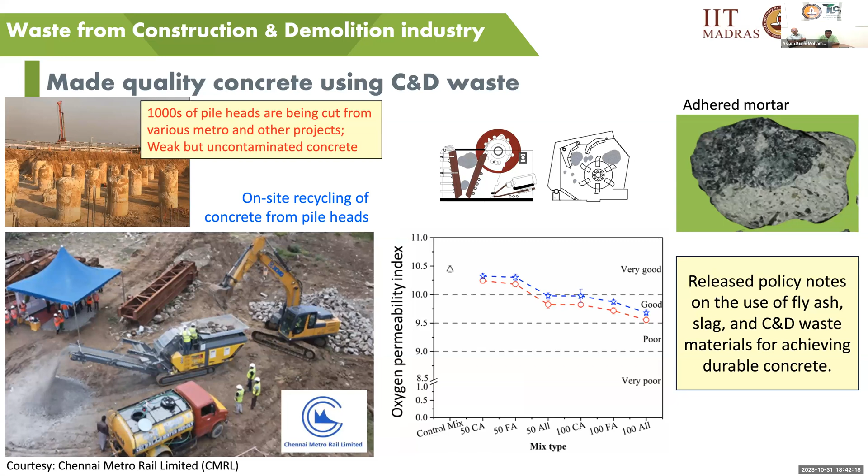Another project we took up involves durability of various concrete systems, which we've worked on for several years, even before the TLC2 center came up. This was a good opportunity to take this research to the field. We worked with a government agency, the Kerala Highway Research Institute, where they were building a major bridge on the coast with a target service life of about 100 years.

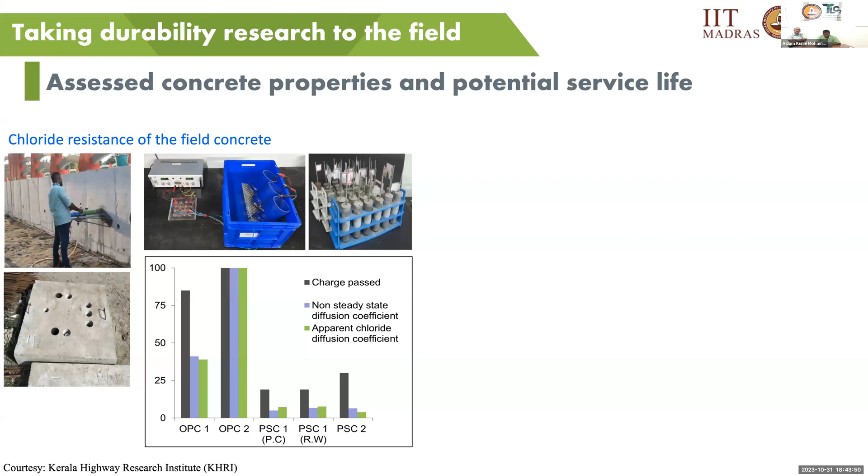To implement it, we first had to convince them that this concrete is useful, so we cast specimens on site and tested concrete specimens collected from the actual structure. We found that the durability of such concretes can be much higher compared to OPC concrete. We also looked at service life estimates and found that with slag concrete, the service life can be about 4 times more than OPC-based concrete.

This was very promising, and they were very happy. Now we know they're actually implementing this type of concrete in other bridge projects as well. But to actually implement it on site and ensure good quality control, we have to specify certain properties.

For this, we developed nomograms where we look at the properties of the binders and the structural design aspects, and then specify that if you use this, you have to go with a concrete type that has a durability parameter, which I'm calling MXDY - M stands for mechanical parameters and DY stands for durability parameters. So if you're talking about a target life of 100 years or so, we have to bring in a durability parameter to specify the concrete.

We also looked at how sustainable these slag concrete mixes are. As you see in this graph, the more the mix comes to the bottom left corner, the more sustainable it is. We also looked at carbon footprint savings achieved by changing the mix design from OPC concrete to slag-based concrete - about 36% carbon footprint savings is possible if the entire bridge is done with slag concrete.

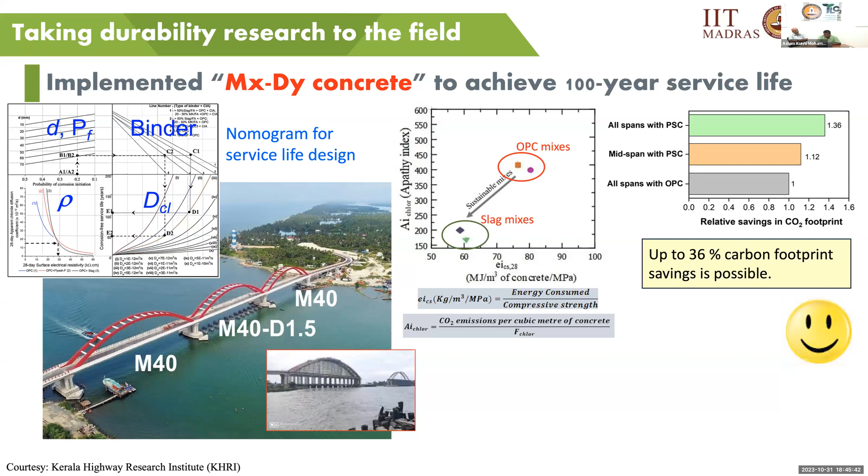But for this particular bridge, we were able to save about 12% because only one span could have the mix design changed. For future projects, we expect more opportunities where SCMs and the MXDY concrete concept can be implemented, helping us make durable construction while saving a lot of carbon footprint. I'll now request Professor Koshy Varghese to talk about process waste and how we are handling that.

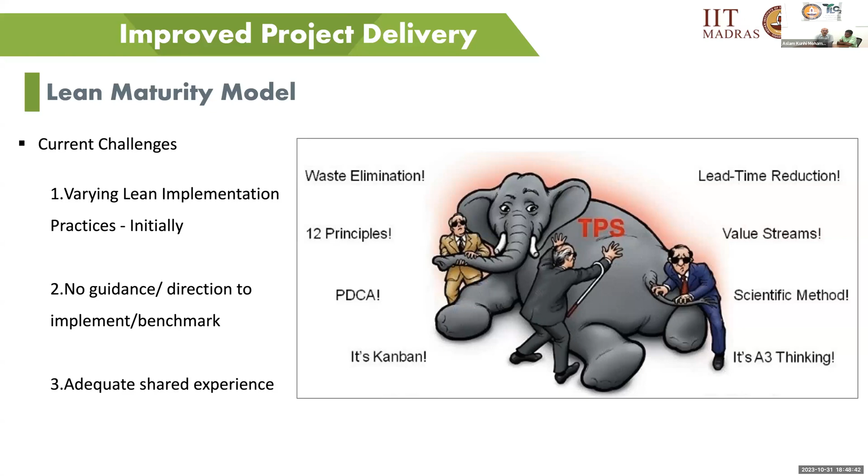Now, to go on to the next slide. When we look at the lean maturity model, we needed a roadmap. Then we needed to also assess. Several organizations claim they are implementing lean, but we wanted to assess where they are. They might say that we've been implementing lean for so many years, and they talk about the project benefits that they've adopted. But I guess in the initial years, there was a little bit of a distributed approach because people needed to explore where they are.

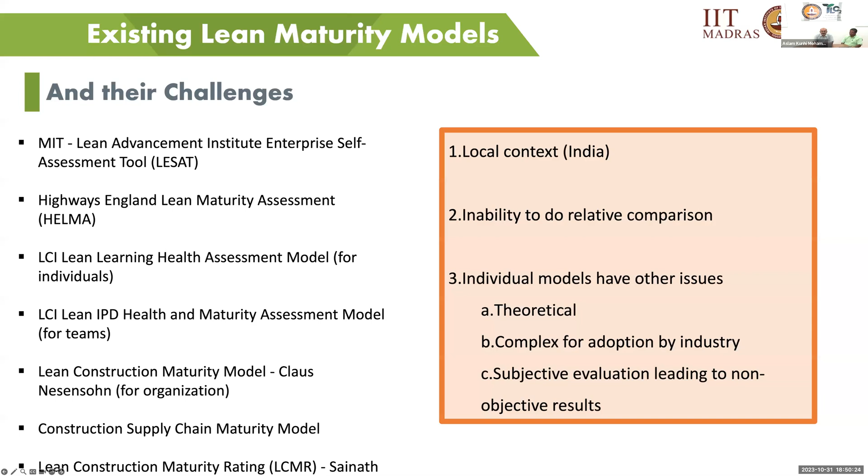One is there's no local context to the Indian context. So when you start trying to take some of the benchmarks from these models, there is no relationship to what is happening in India, so it just does not make sense. And there was inability to do relative comparison and a lot of other issues, in terms of the model being too theoretical, too many weighted indices in the model. We were just not able to go forward with it.

So we decided that we needed to develop our own lean maturity model. We call it the ILCE Lean Maturity Model, which is coming from the group at IIT Madras, along with collaboration with the industry. Basically, it should be Indian context with industry relevance. It should have the lean maturity based on our roadmap. There should be a general roadmap.

It should not be too prescriptive, but it should be milestones that are familiar to the ILCE organizations, taking best practices within the Indian context. Also important was to make visible progress. If you tell a company they're going to reach the next milestone only after 5 years, there isn't too much buy-in. Whereas with every year, if they can see some progress made, there is also momentum developed based on this.

And the last point, as you can see here, we wanted clear evidence based on documentation and observation. So when a team goes to assess the maturity, it should be evidence-based and not just on anything else.

We basically have, moving to the next slide, we have now come up with a framework where there are these 4 levels. There's an L0, which says no awareness, because several companies also come to us and say they are doing Lean, or several projects come to us and say they are doing Lean just because there is some small aspect which they think it is, but we have an L0 for that.

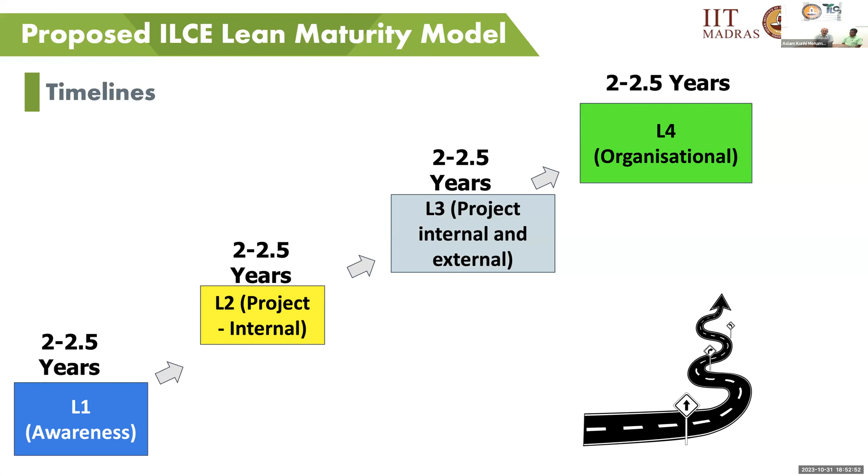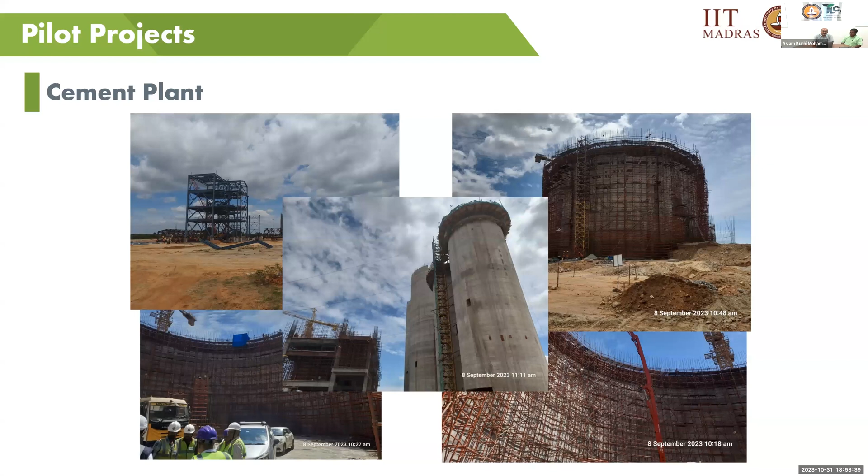So with this, what we did was then we needed to actually start calibrating, see if this model works or not. So what you see is the photograph of a cement plant, which is under construction. A team of us went here and tried. This group was kind of implementing Lean on the project.

So we spent 2 days at site to look at all the dimensions. You can see there's a full planning board there, teams of planning staff, and teams of execution staff also there. The impressive part of this group was that Lean was actually practiced in several processes at the site level. However, there was absolutely no documentation. So when you asked, people knew things, but there was no way they could deep dive or go into more detail because there was no documentation.

So we are actually positioning this group right now at an L1 medium, because having a documented strategy and process is a very important part of being able to move forward.

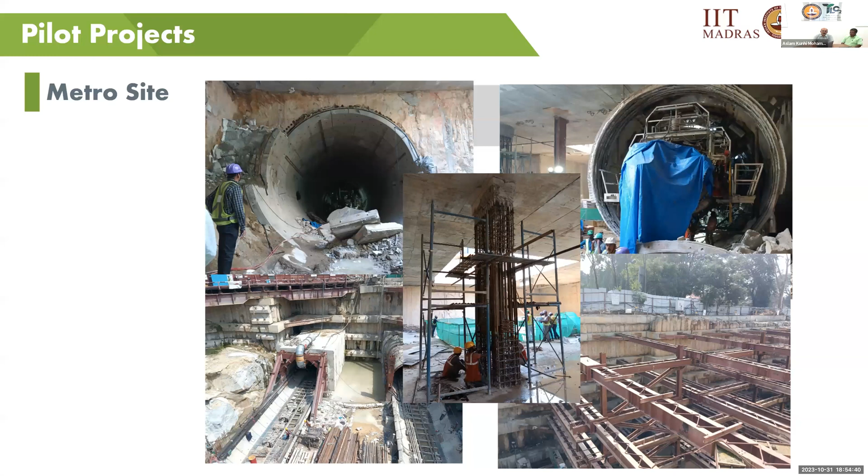Going to a second example, this is a metro construction. There are several metros going on site. You can see a little bit of the tunnel as well as the station construction. There were several stations in the scope of this work. We visited all the stations, we visited the head office, and we did meetings to assess what the kind of implementation was.

So here you can see there's evidence of top management support. There were part-time Lean champions. They had very good documentation of the process, and there was very good awareness at the office, so any person you talked to in the office really had a good grasp of what they were doing. But when you went to the site and started going down to the last planner, or into detail on how teams were actually implementing it on site, there was a breakdown in communication.

So while the documentation was good, it looked like they could do a little more to get this thing going to site. And of course, this was a much more challenging, much bigger site with a lot more details. The best position, we have not yet placed them, but the best position they can go is at an L1 high.

So we are going forward with this. Part of the TLC2 agenda is to formalize this as a framework and get other projects in India to adopt these practices. Review and refinement, we need more pilot projects. One feedback we always get is this has to be aligned with corporate benchmarking, whether it's lean or sustainability, and to bring sustainability parameters into this benchmarking so that an organization doesn't have to do different kinds of maturity assessment, but a holistic single assessment to know where they are.

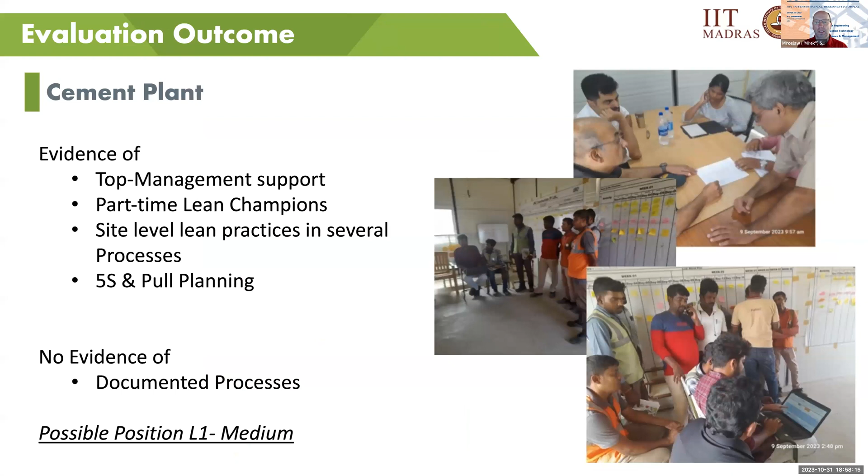industry, and in our case, sustainable construction. In other words, we are interested in environmental sustainability as well as economic, but with the emphasis on environmental sustainability, as well as resilience, particularly to climate change phenomena that are, of course, very well discussed, and they're always on the forefront of popular press and popular discourse around the world.

But in addition to that, there is also a renewed interest in human well-being. In other words, there is a need to emphasize the well-being, the satisfaction of work of all the participants, all the stakeholders that participate in construction projects. I would

like to ask the audience, anyone who would like to speak to that, as to how the ongoing efforts at IIT Madras relate to recycling of construction materials, recycling the waste in particular that is being generated. That waste is really staggering. According to statistics in the United States, about 60% of all the volume of solid waste in municipal waste sites is actually construction related. It's either waste from new construction projects or

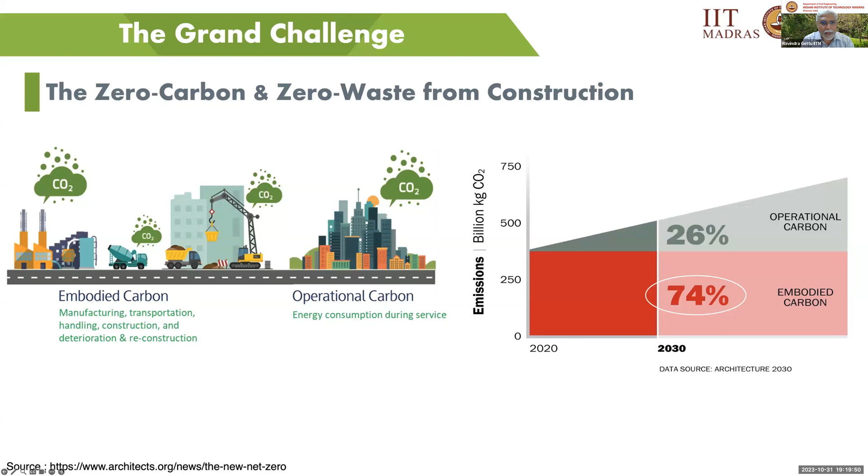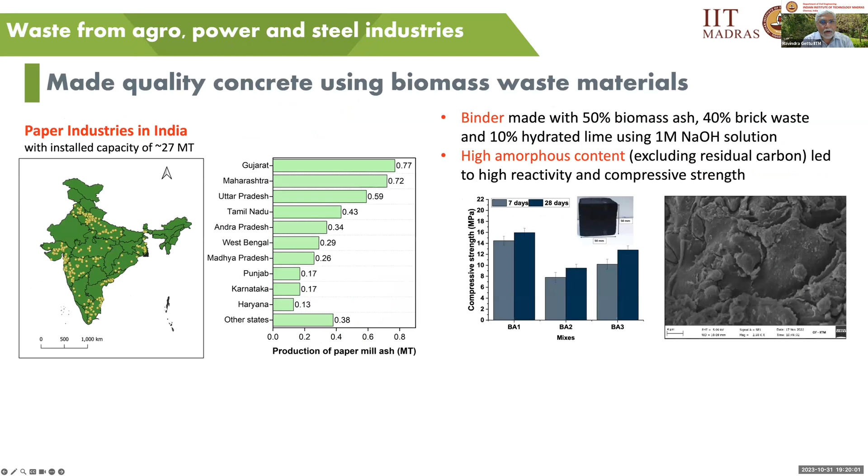So you asked a very right question on how are we helping people in the field choose something sustainable. We started off looking at concrete. As everyone in the concrete field knows, there are infinite concrete mixes that could satisfy the requirement of a construction project, usually based on workability and compressive strength. So we tried to come up with a framework, a chart made for any site, which would have indices based on 4 components. One would be the embodied energy, which also reflects the cost and the use of raw materials. The strength of the concrete, what could be the mix, is shown here.

The other component would be durability. We insist that durability is key to designing something sustainable with concrete construction. We cannot afford to have something that's not durable enough. And the fourth aspect would be environmental, bringing in the carbon footprint. We strongly agree with you that carbon footprint is not the only way to look at sustainability—it's much broader.

Now, as Ashwin said, we have to start looking at it from the design point of view. In a project that Ashwin and I are working on together, we found that at the contract stage itself you have to know where your materials came from. That means when you put a specification out for bidding, the contractor has to be ready to tell you where all the materials came from, what the sources are, so you can calculate the carbon footprint. Otherwise, you're stuck with a database which need not be relevant at all. You could have a database made in Switzerland and try to fit it into a concrete structure in Chennai, and it won't work at all.

What we are also looking at is maybe a portal or database. We are thinking of a materials passport, where people can put up the values they obtain, not only for mechanical properties but durability and so on. So people can look up and use this for an educated choice of sustainable materials and technologies in construction.

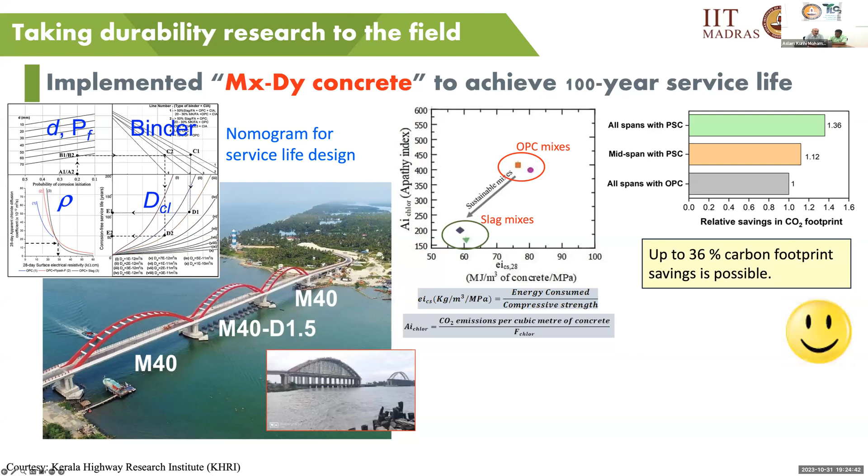So yeah, I'll start out with one dimension of it. I think we're going from the decision support or the tools—there's a lot of tools out there, but all of them are driven by data. So I think it's about how the organizational effort or policies required make sure that the data we use to calibrate these tools is relevant. That's where I think we also have to start, because we've seen a lot of tools that are more conceptual, and then they do a prototype, and then they say if you feed in the right data, it becomes okay.

But it's where we have to start is with the data. I think, as Ravindra said, in the Indian context there are a lot of pipelines we have to develop to start gathering this data. And we see that these pipelines are starting to fall in place. As policy in the government and among clients develops—for example, the project he talked about at IIT Madras—we are saying we want to be able to select the contractor based on the material passport. Once these policies fall in place, I think the data will start becoming more available.

And then in parallel, we have to go to the technologies we are going to use. There are a lot of technologies, and I'd also like to bring in your earlier question on design. In terms of the processes we use to bring in the right materials and integrate this with design, we are going into a multi-criteria decision-making kind of issue.

We have a lot of models which can do that, but ultimately, how do you calibrate these models? How do you bring it back to your decision-making preferences? These are the tough questions we have always had to answer, whether 25 years ago or now, and those questions will remain. But probably the optioneering available today with the computing power and technology—the options we can generate to see what-if scenarios, the simulations we can run—will give us a better way of coming to the right decision, the decision we would want to take as part of policy. That's the way I would look at it.

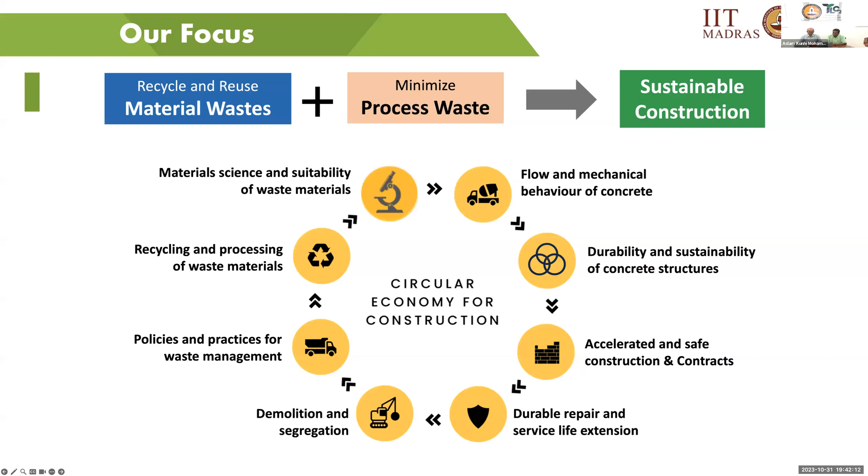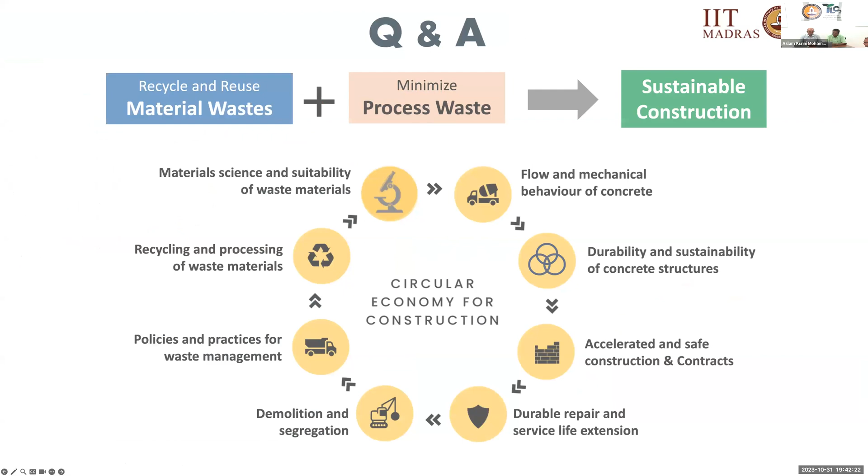I just wanted to take a couple of minutes to inform people about the kind of plans that we have going forward. I think many of these are set to answer several of the key questions that Professor Mirek had raised. So we have a plan to have a TLC2 Experience Center. The idea of this Experience Center is to look at how we can develop strategies to implement state-of-the-art research that we are currently involved in pilot scale applications.

We also want to look at evaluation of alternative materials and processes, strategies through physical and virtual test beds that we'll be establishing in this Experience Center. One of the major objectives of this TLC2 Experience Center would be to train human resources to essentially propagate the kind of things that we are trying to work on in our research.

And of course, this will also involve engaging with industry through consulting services on several sustainability related aspects, including policy, auditing, contracts management, and of course, all the other research that we are already currently doing with respect to materials and processes. The other idea is to bring out new products and methods into the industry. Engagement with startups is going to be one big activity in this Experience Center. We hope that all those who have interesting ideas in this domain will come forward to integrate and work with us.

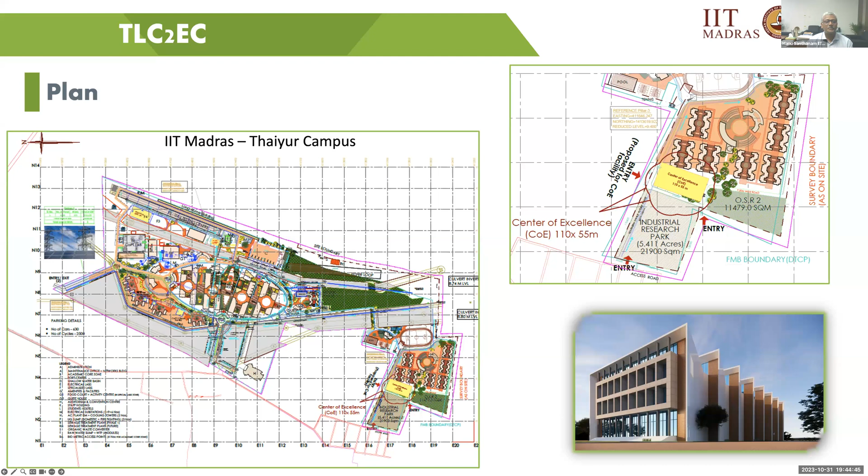This facility will have several important features, as you can see in the next slide. What we want to do is have a workshop space that looks at processing equipment for aggregate. That is obviously one of the key areas that we're looking at. We are also looking at industrial agricultural waste processing and cement production related equipment that can help engage even the cement industry and other manufacturers who are doing alternative materials manufacture for concrete applications.

3D printing is again one major aspect that we'll take a look at in terms of different types of printers which will be housed in the facility to try out various different ideas with 3D printing. And we'll also have a facility for large-scale testing, not just 3D printed wall panels, but also looking at precast segments and tunnel linings, and also develop facilities on structural health monitoring.

We also intend to have a pilot plant for solar-enabled thermal treatment for recycled concrete aggregate. This is something that was developed at a smaller scale in research in our group in the last couple of years. We want to take this to the next level and try and propagate this idea to the construction industry.

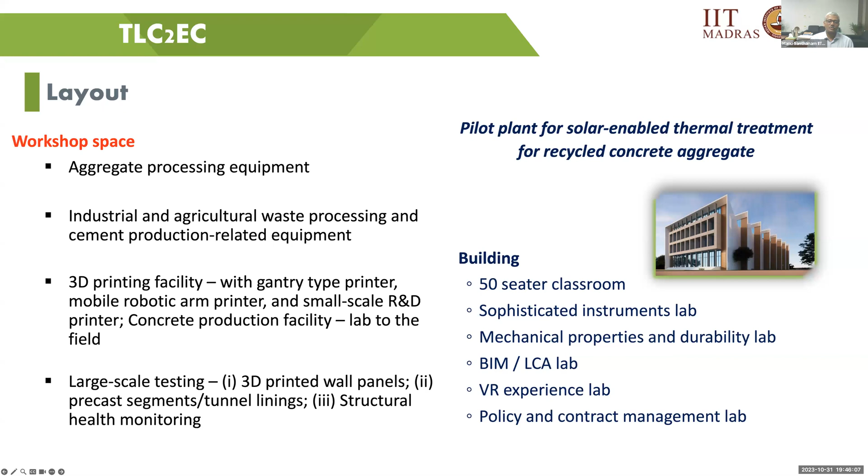Additionally, the building will also have space to train people and also house sophisticated instruments, and also a mechanical properties and durability lab, along with labs to look at lean construction aspects like BIM and LCA, and also a virtual reality experience lab that can help us visualize several of these processes that lead to much better strategies for construction process. Next, please.

Thank you, Nikhil? Yeah, thank you, Mr. Manu. Over the chat, I was seeing a lot of excitement by young engineers, not necessarily only civil engineers, but data scientists and mechanical engineers are getting excited about this. And we encourage it too.

We would love to meet some of you through this link that has been sent. Send us your queries, the kind of ideas that you have. We always have opportunities to engage with students through projects and internships, so that is a channel we can explore. You can visit us, see what kind of work we are doing, and see where you can contribute. In fact, you'll be surprised that some of the leading startups in the area are run not necessarily by civil engineers, but mechanical engineers and data scientists graduated from IIT Madras and other universities. These days knowledge is becoming interdisciplinary, and we stick to those principles. So please reach out to us.